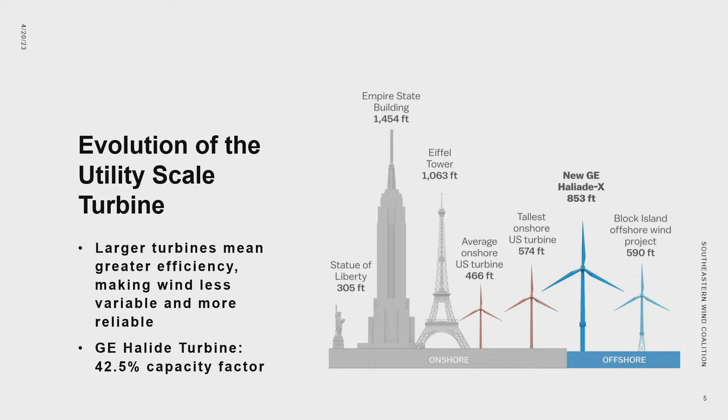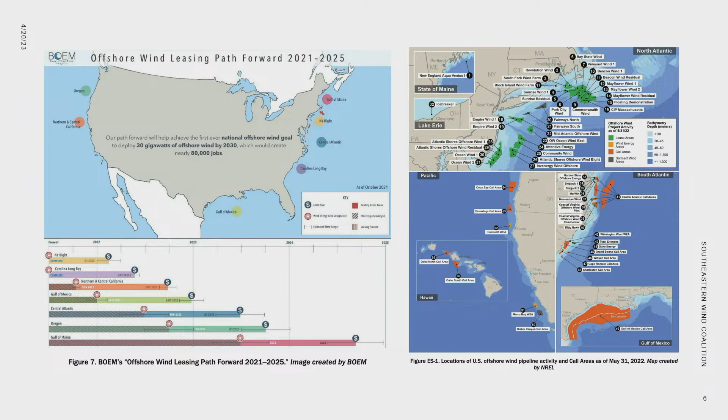I like to show this map because it represents the various 25 projects in various stages of development across the coast. I really like to mention here that the driver for state procurement goals has really been the clean energy and carbon reduction goals that we're seeing across the state. It's really important to note that while North Carolina has a great opportunity for offshore wind, there are a lot of states in the same boat making their best case to various parts of the industry with open arms for companies to come set up shop and invest privately in ports, manufacturing facilities, or various infrastructure related to offshore wind. This map on the right just shows some of the projects in various stages of development.

Also, North Carolina prides itself on its manufacturing workforce. We've got a world-class university and community college system gearing up to support the workforce transition to offshore wind. We've also got 2 great ports, the Port of Morehead City and the Port of Wilmington, that can support various stages of offshore wind life cycles, whether that's staging, manufacturing, or marshaling, and can also support projects beyond the North Carolina projects. We've also got 55 plus existing land-based wind and supply chain companies in North Carolina. These companies already function in the manufacturing supply chain for land-based wind, and there are even more companies that have expressed interest in transitioning their work to support offshore wind manufacturing.

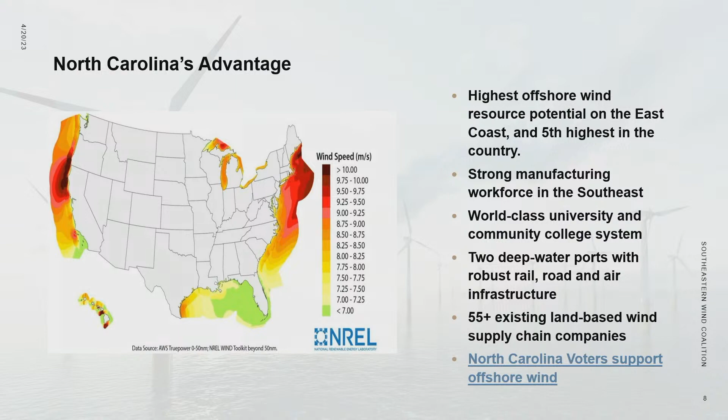Something really important to note here that I forgot to mention on my earlier slide about the evolution of offshore wind turbines: the tier 1 components, which are the blades, the nacelle, the tower, and the foundation, are huge components, again 853 feet tall when they're all together. Those large components have to be manufactured on the coast. But there are also smaller components that can be manufactured throughout the state. There are 8,000 components in a wind turbine, which is something that most people don't know.

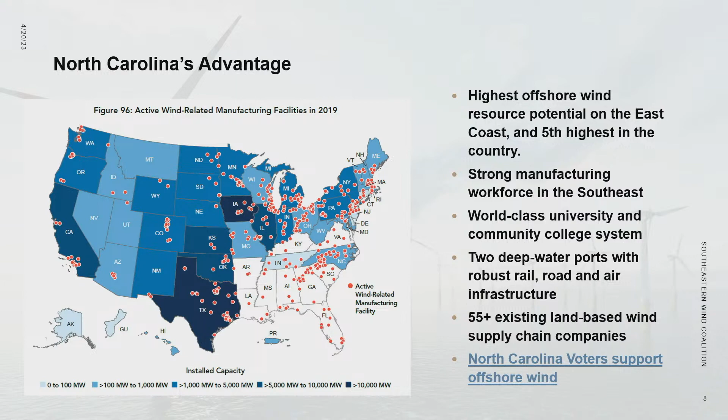This map right here shows installed capacity for land-based wind. Even though we don't have a ton of installed capacity in North Carolina, these red dots represent active wind-related manufacturing facilities. Again, this is a really great opportunity to bring manufacturing and economic development to places beyond the coast. But what's really important to remember too is those large components do need to be manufactured on the coast, and we have a great, unique opportunity with our ports, the way they're laid out and structured, to support offshore wind specifically.

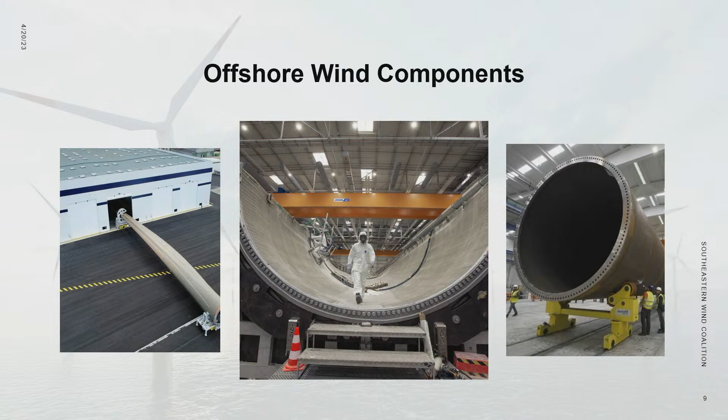And again, these are just a few components. That's a blade on the left. The middle picture is also the inside of a blade before it was completed, and the picture on the right is a tower. So huge components, again, need to be manufactured on the coast.

Some of the benefits I like to talk about when I talk about offshore wind are grid resiliency and diversity. Offshore wind has a very complementary generation profile to other energy resources, and it contributes to a more diverse grid, especially in times of high load demand. I know most people are aware we experienced rolling blackouts on Christmas Eve that affected over 500,000 Americans. Avangrid, the developer of the Kitty Hawk wind energy area, was able to pull meteorological data from the time of those blackouts. We had about an 1,100 megawatt deficit during that time, and because we are not part of an RTO and are part of a vertically integrated monopoly utility system, we did not have other places we could borrow power from. The Kitty Hawk wind energy area would have created about 1,300 megawatts of power, just a little bit more than what we needed to meet that deficit.

So having a variety of resources is really important for grid resiliency and diversity, and offshore wind has a great opportunity there. Energy independence is another great benefit that I like to communicate to coastal communities.

It's a homegrown energy resource that won't fluctuate with commodity prices. Again, there's a huge opportunity for workforce development and a growing pipeline of projects. These potential jobs and workforce development opportunities that could support North Carolina projects will also support projects up and down the coast.

It's a source of carbon-free energy, and we're talking about decarbonizing our grid. Offshore wind generates electricity without burning any fuel or emitting any carbon dioxide. Carbon-free energy is going to be necessary to protect coastal communities, and a lot of states, as well as our federal government, have set aggressive goals for decarbonization. But a variety of resources is what's going to be needed to get us there.

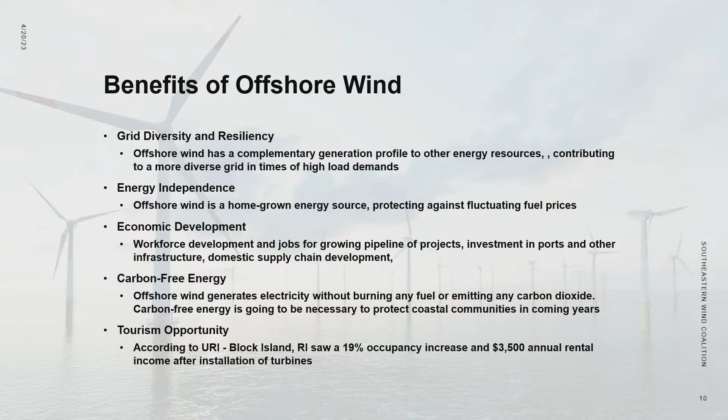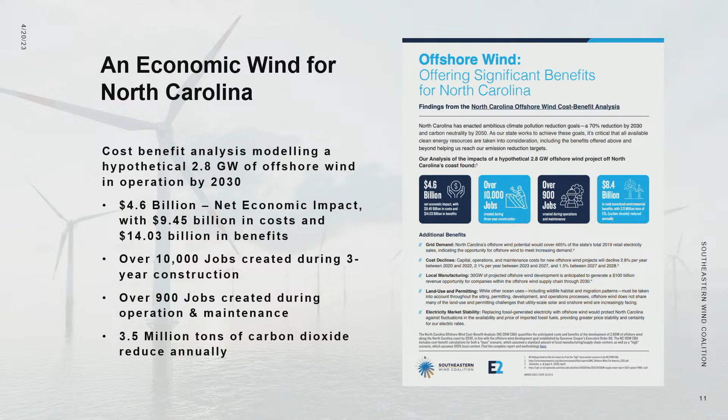SEWC and our partners at Environmental Entrepreneurs, or E2, conducted a hypothetical cost-benefit analysis that modeled a 2.8 gigawatt project, about the size of Kitty Hawk Wind, in operation by 2030, and it found about $4.6 billion in net economic impact.

I'm just very quickly going to give you a brief overview. We've got Kitty Hawk Wind off the coast of Corolla, North Carolina. That's about 122,000 acres and estimated to support 2.5 gigawatts. It's 27 miles offshore, and right now the first phase is looking at transmission routes coming onshore in Virginia Beach.

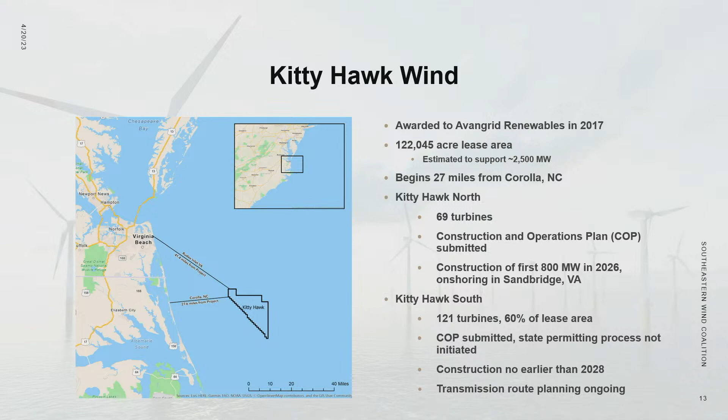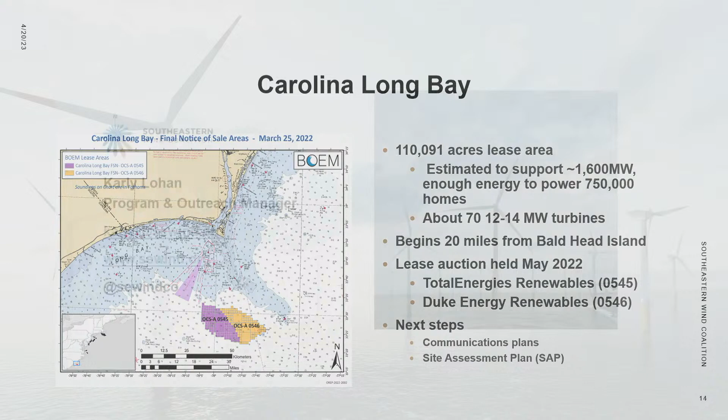This project is still very early on. We're about a decade away from any construction and operation. Here's my contact information if you have any questions. Thank you.

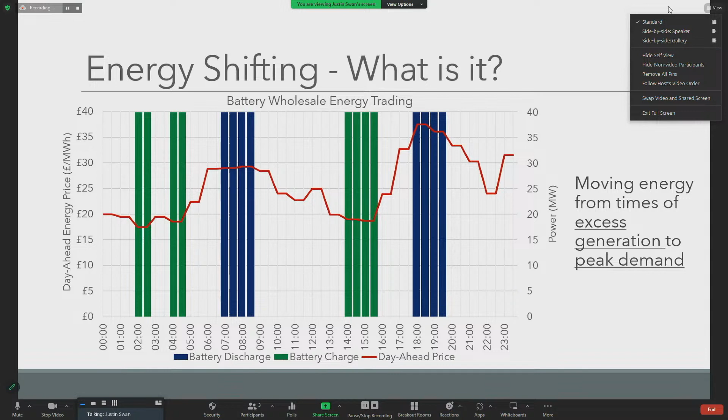So why batteries for this? Firstly, batteries, in particular lithium-ion batteries, have extremely good round-trip efficiencies, the best of pretty much any commercial storage technology, getting up to about 90%. That just means you're wasting less of the energy used to charge the battery. Second is the cost of the batteries themselves, which over the last decade has dropped significantly due to investment in electric vehicles and consumer electronics. It's basically the exact same technology used in these grid scale batteries, and they're the lowest cost form of storage up to about 4 to 6 hours of discharge. Anything less than that, lithium-ion is about the cheapest form of storage at the moment.

The next major use is grid stability, which is inherently a bit technical, but I'll keep it high level. The main thing we're talking about is frequency — how quickly the electrons are oscillating in your wires. On the electrical grid, that needs to be kept in a very narrow band to prevent issues with the grid. So basically, if a large generation plant suddenly drops off the grid, or a large demand suddenly comes on, you get a sudden drop in grid frequency, and you need something to replace that generation or make up that sudden increase in demand to keep the frequency within the tolerable range.

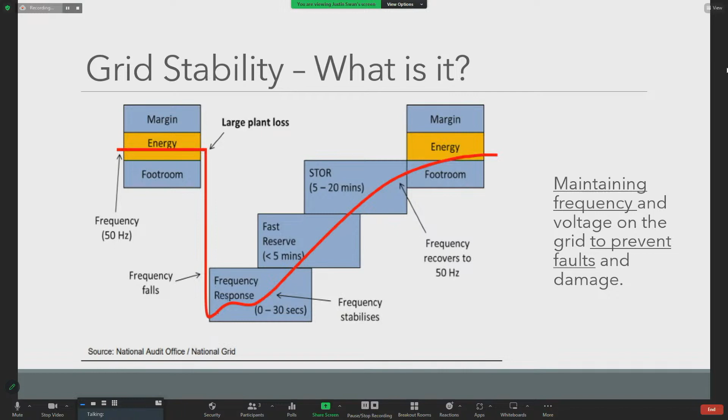So again, why batteries? As we transition away from thermal generation — coal power stations and gas generators, which are big, large spinning machines — they keep an inertia on the grid. As we move away from that, the grid will become less stable, so changes in demand and generation will cause bigger fluctuations in frequency. We need something that can maintain that frequency and keep it in the operational range, and batteries are ideal for that because they can respond extremely quickly, faster than any other technology that ramps up and down.

We in the UK have something called the dynamic frequency markets, and that's entirely supplied by batteries because of how quickly they can ramp up. There's nothing else that can meet the requirements, basically. So that's going to become more and more important as we transition to net zero.

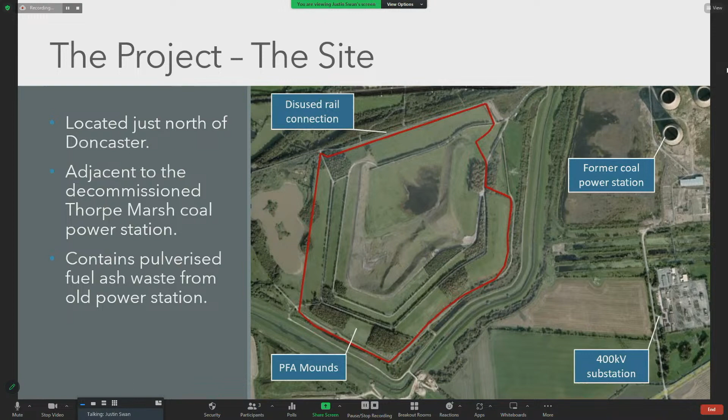On the site, there's currently a waste product, pulverized fuel ash, that forms a horseshoe around the bottom of the site — a waste product from the old coal power station. So what we plan to do, firstly, is recommission the railhead on the site, which will transport the majority of materials to and from the site, because the local road network isn't built to withstand a high volume of HGVs. The railhead will be able to bypass a lot of the HGV movements on the local road network.

So 1.4 gigawatts, or 2.8 gigawatt hours. That's a 1.4 gigawatt battery that can discharge continuously for 2 hours. And if built today, that would make it the largest battery in the world. We don't know whether something bigger is going to be built in between now and when this gets constructed. But at the moment, it's about 14 times the size of the biggest battery currently operational in the UK.

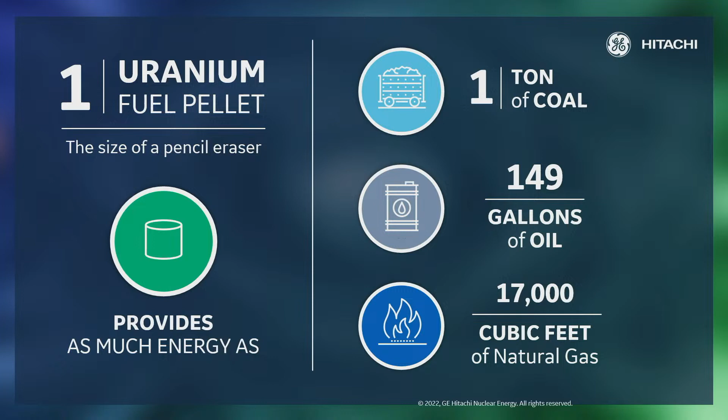One of the benefits of nuclear is the fact that it's a very energy dense source. As an example, a uranium pellet, which we manufacture just a few miles from here, up the Cape Fear River near Castle Hayne, a pellet roughly the size of a pencil eraser or the tip of your pinky, provides the equivalent energy as a ton of coal, nearly 150 gallons of oil, or 17,000 cubic feet of natural gas. Now that's important when it comes to the land usage which nuclear utilizes.

A common concern about nuclear is the waste it generates. It turns out that if you took every atom of nuclear waste generated since the 1950s here in the United States and piled it into an area the size of a football field, it would only equate to a depth of 24 feet.

The good news is that we know where every atom of nuclear waste ever generated is specifically located, and it's been safely stored, in some cases for decades, in highly engineered canisters. There's work to create other uses or storage approaches, but there's also nuclear technology available that can take this waste and actually burn it or consume it as a fuel source, turning what we once thought was waste into an asset.

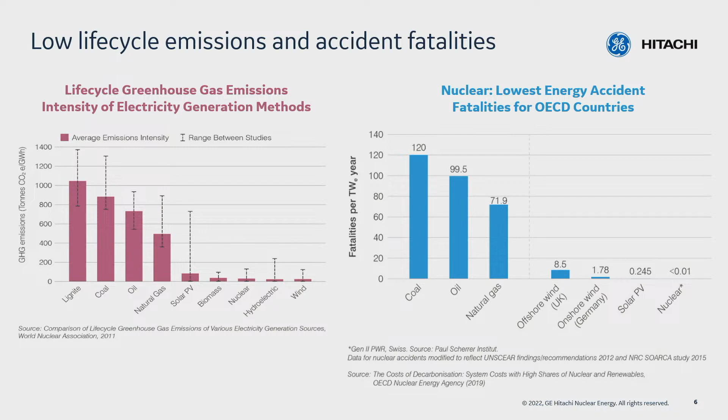Shifting now to GE's nuclear business, we actually got involved at the dawn of the industry and helped pioneer the commercial nuclear industry, both here in the U.S. and in Canada. We formed our atomic energy division back in the 1950s. Just two years later, we had the very first nuclear plant synced to the grid, the Vallecitos boiling water reactor, located just outside Silicon Valley, California. Five years later, we were part of a team that deployed the very first reactor in Canada. Since then, for the last several decades, we've been deploying reactors, with 67 reactors licensed in 10 different countries.

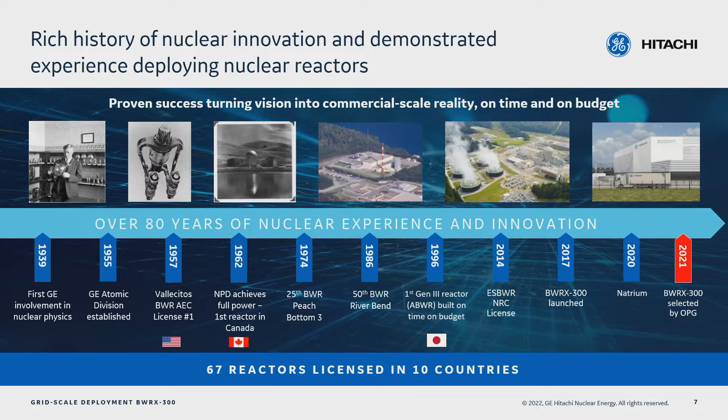We believe the future of nuclear is in small modular reactors, and that's what I'm going to talk about going forward. A key milestone shown in red on this page is our technology being selected in the very first global commercial competition for a grid-scale small modular reactor — Ontario Power Generation selected us. Since then, we've seen a snowball effect and have actually captured every commercial competition so far to date, based on the technological advances of our SMR.

A little bit about it: the BWRX-300 is the name of the reactor. We tend to use acronyms in the nuclear industry — BWR stands for Boiling Water Reactor, which is what we're experts in at General Electric. The X stands for 10th generation boiling water reactor, so this is a proven technology building on decades of prior design and licensing pedigree. The 300 denotes the output, 300 megawatts electric.

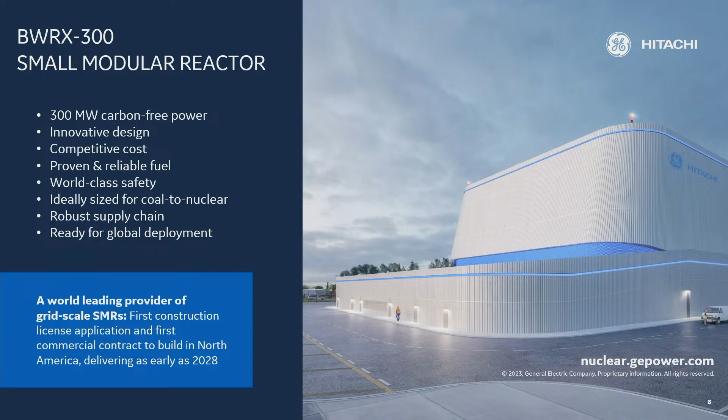Highly innovative, proven, world-class safety — this will be the safest design we've deployed to date. It can essentially shut itself down without any operator intervention, and can do so for several days without the need for off-site power or operators.

The innovative aspect is that we've taken all of our prior decades of design expertise and created the simplest, most cost-effective design through new innovations that have enabled this much higher level of safety. It's allowed us to eliminate a significant amount of concrete and construction materials. So although we're going smaller in design, this will actually be more cost-effective on a per megawatt basis than the large reactors.

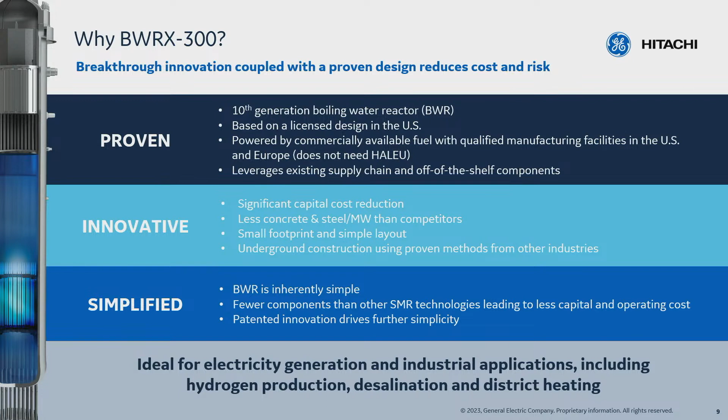We've experienced significant interest in the global market. I mentioned Ontario Power Generation in Canada, and that's really where it started. They did a 2-year evaluation, and there is such tremendous interest in nuclear technology today to solve these big world problems that there were over 100 designs Ontario Power Generation evaluated. At the end of the 2-year review process, we emerged as the winners.

It's really been a snowball effect in terms of the level of interest. Tennessee Valley Authority in the United States has selected our technology. By the way, in Canada, we've submitted a construction application that's under review. That plant will be operational by 2028.

In Poland, we have a partnership with Orlen Synthos Green Energy that has announced the need for 79 of these small modular reactors, and there's tremendous interest around the world. I do want to point out the UK, because in leading market development, that is where I've spent the majority of my time. This is a country that has established a great vision, 24 gigawatts by 2050. We believe we're going to be an ideal solution for that market.

So we've really been working with supply chain partners to help establish our presence in the UK and create a potential manufacturing center of excellence that we can then leverage in the global market, especially markets like Poland that have such a tremendous need for SMRs. And then recently, just a couple weeks ago, we had a major announcement in Washington, D.C.